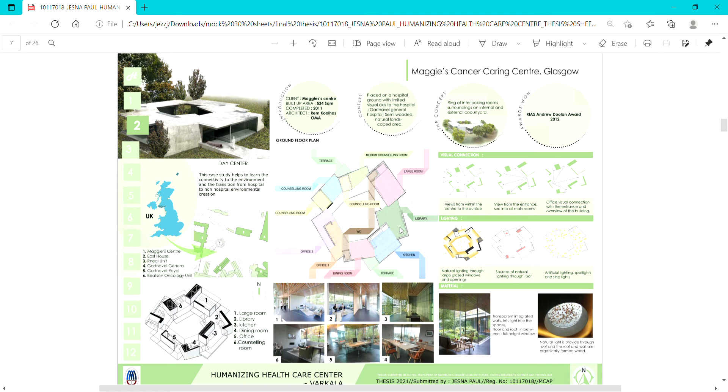In order to acquire more knowledge regarding a hospice, I have studied four different case studies. The first three literature case studies are day centers, which include Maggie's Cancer Caring Center at Glasgow by architect Rem Koolhaas. Instead of creating in-situ rooms, the building is designed as a sequence of interlocking L-shaped figures. The second one is Maggie's Cancer Caring Center at Dundee by architect Frank Gehry. The third one is the Maggie's Cancer Caring Center at Fife by architect Zaha Hadid, which stands overlooking a hollow landscape with direct visual access from the entry itself to the landscape.

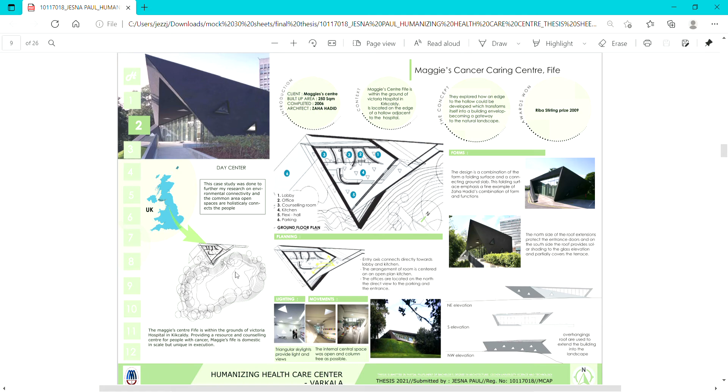The main reason why I studied these three case studies is because of an idea that came into my mind. These cases have form and landscape connectivity, both in space and human interaction. The next live case study is a residential type and also a day center type: architect Sanjay Mohe, Bangalore Karunashraya Hospice.

He oriented all the wards towards the east so everyone will have a rising sun experience to bring more positivity into life. Activity is focused around the water body, and the wards are designed with nurses having direct visual access to their patients' wards. But there was an issue: the staff can't stay longer at the nurses station because of the smell of the toilet placed near the station.

So I have compared various aspects of the case studies I did and have come to a conclusion on how and how not an aged people's caring center should be. Then I charted out the area programming from case studies and standards. I have prepared some important notes on the taken areas with which to design the spaces as well.

The design build-up began from the site and site boundaries. The ultimate thought process was to connect the aged people, their family and other inhabitants to the existing unbuilt character on site. Through my site analysis, the shape of the jagged edge to the roadside, the contour pattern, and 60 meters below the road level to the lake at the southern end, I came across the major issue on the site, the existing natural valley at the center position. It acts as the connecting part of the two sites, and I also took rules based on 200 meters being the average moving distance for disabled people.

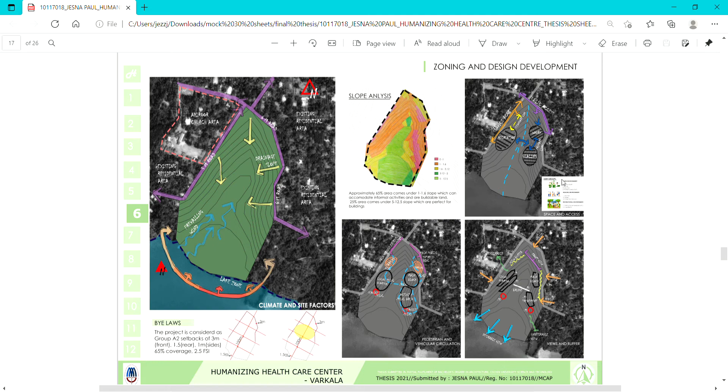Then I divided the site into three major parts based on site conditions and slope analysis: the front portion welcoming area, the center building area, and the last end portion as an unbuilt and water-friendly treatment area. So the center portion of the site is considered the most built area, connecting the two sides and also providing privacy from the outside. In the built zoning, the user group functions and the area that can be built based on the area programming are divided into three parts: main block, recreation and healing environment, and residential.

Then I had to first alter the site and see where I can place the buildings, what the contours are, and how the contours can be edited. You can see that the highest level and the roads are on the 2-meter level. So locating there would make the most of privacy, and the monsoon water flows downwards through the site and overflows at the lowest portion.

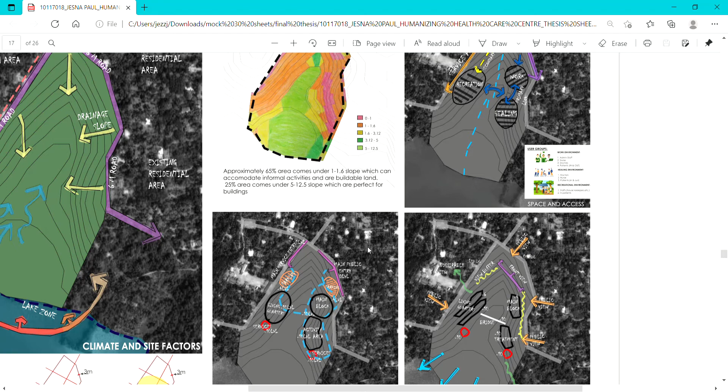So what I altered is that the road level is the main part, and the other contours slope towards the southern direction. So I split the contour in two parts so we can get spaces like the public main block space, recreation and healing space, and residential space. According to the section, we can see how to add this after altering the current contour.

I thought about how to connect these two levels vertically, because it's for elderly persons and for urgent emergencies. That was influenced by Marcel Duchamp's Nude Descending a Staircase painting. He began to break away from cubism. The painting concentrates on depicting its subject in motion. So I concentrated on how motion makes different vision frames and emotional connection, and on bringing all levels to connect.

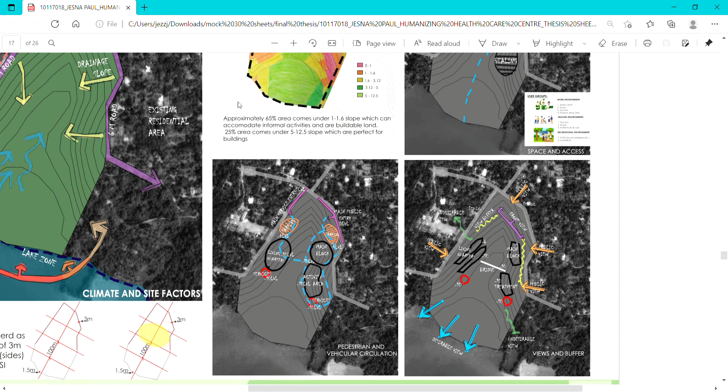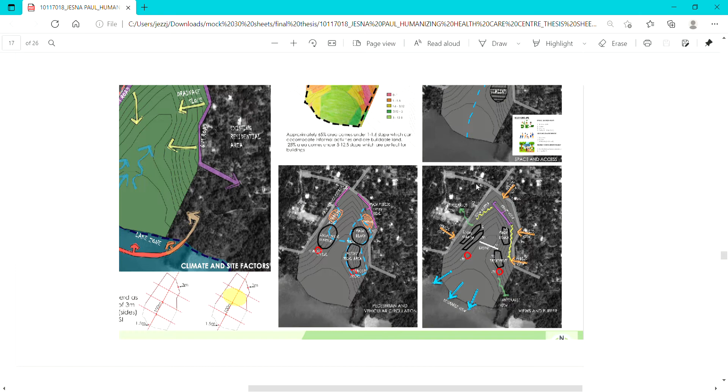These are my programming sheets of the space divisions: the main block and residential spaces, which parts they include, and the individual spaces, where they're placed and what functions they include. These spaces are explained here. Then I did my zoning based on the concept and a series of vision frames connecting the two levels vertically through the ramp, always connecting to nature.

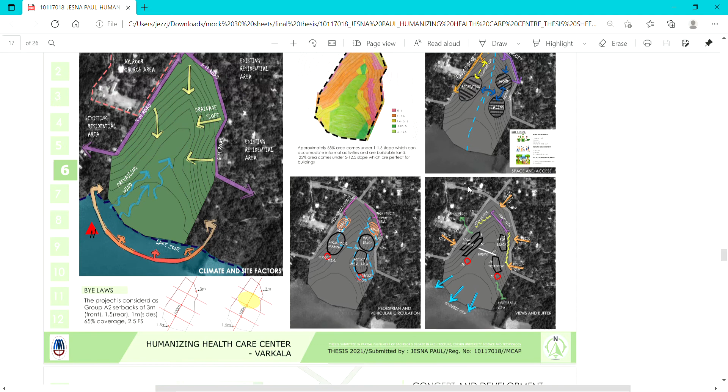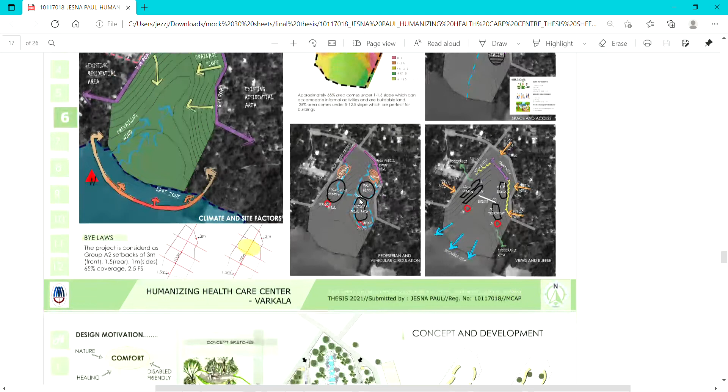So the contextual area of the site consists of residential and commercial to the north and east side of the site, the west side is located to a church area, and the south connects directly to the lake. So my main intention was to create a block vertically connecting the two levels, using the sun position and the wind to our advantage without breaking the visual connection.

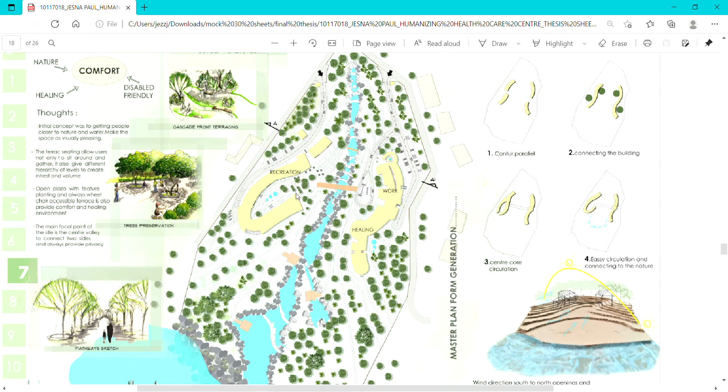So I made the main block 4 meters below road level, connecting the main block level to the next level through a ramp. These connections make shade on the recreation and healing space, always connecting the two levels to nature without disturbing the views, and it's naturally ventilated due to the tunneling effect. The thick vegetation surrounding the site makes a natural buffer and reduces the heat.

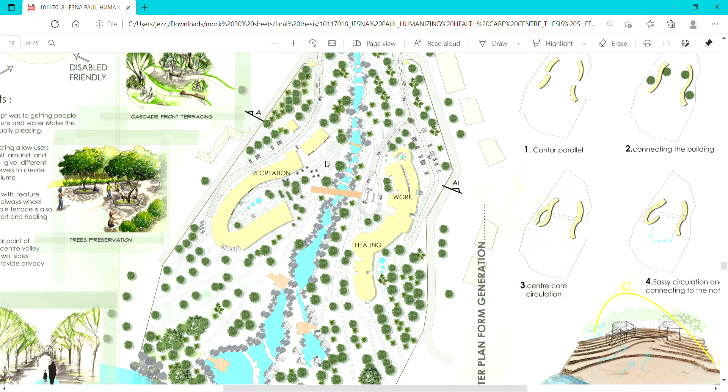So the next thing I did was the access to the level from the road. Mainly two entries are provided to the site. One is the main entry onto the main block, and the service entry gives access to the next level and makes the service easy, along with the bridge connection for the patients' easy access. The main block, recreation and residence spaces go from public to semi-private.

There are actually a lot of trees in the front portion and highest levels of the site, so they act as a natural buffer to the building and provide privacy. The services are shown on the two sides: the water tower and electricity spaces at the highest level near the main entry, and at the lowest part the STP and waste management on the service entry side.

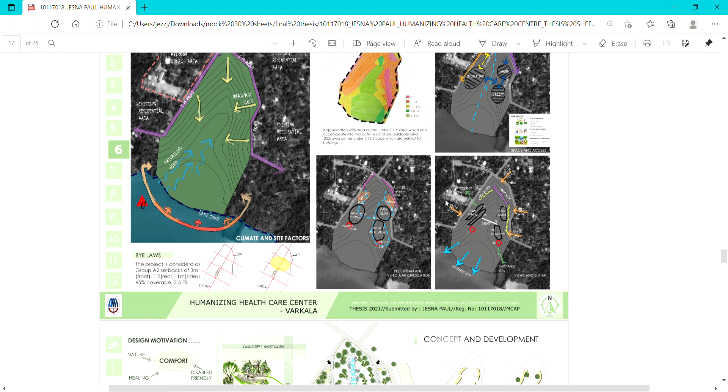So the levels play different volumes of frame vision, so they will see a different view when they wake up, and the caring center needs privacy. I have preserved most of the trees on the site and made it a buffering space. Coming to site views and vistas, with my stepped contours, all of the spaces will have a positive view to the south side. They also make a visual connectivity to the other spaces.

So the main block and admin give positive access towards the south, and the water drainage pattern makes a natural cascade on the site, contributing continuity to the lake, with a bridge to cross the cascade. The reflection makes a different vision experience at different levels.

The initial concept was getting people close to nature, and water makes the space visually pleasing. The terrace seating also gives a different hierarchy of levels to create interest and volume, and the main focal point of the site is the central valley connecting the two sides. The form development is parallel to the contour, from the case study spaces, and provides comfort and easy access for wheelchairs also. The ramp makes these connections, and the wind and sun direction play out as different levels of experience in individual spaces.

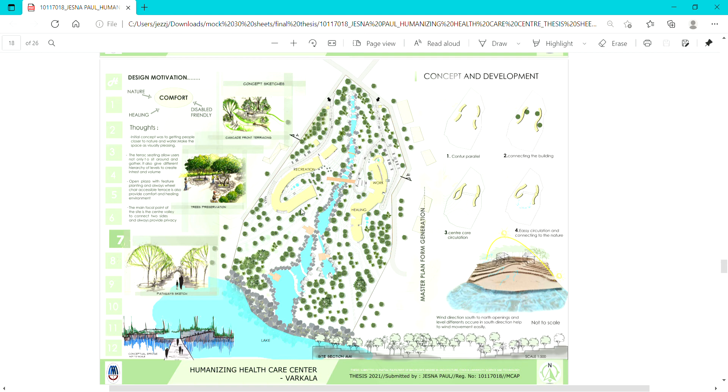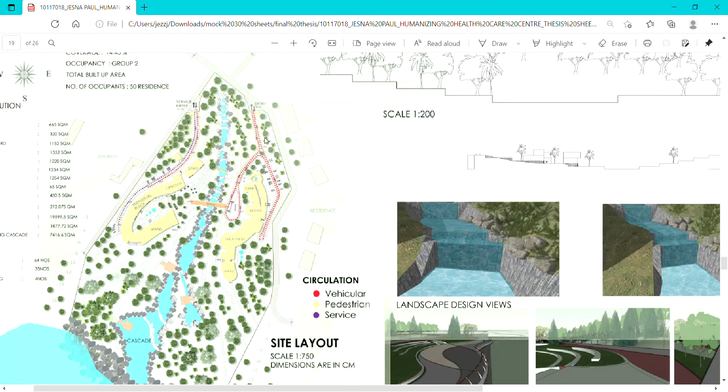Moving to the design, from the main road a person actually sees a green space cascade and the main block, but most of the building is going to slope down, so they will only see the smallest volume of the building. So for views and vistas, I have made blocks in such a way that when a person enters, they get a framed view of designated views from the other spaces inside the building. They define different visual connectivity.

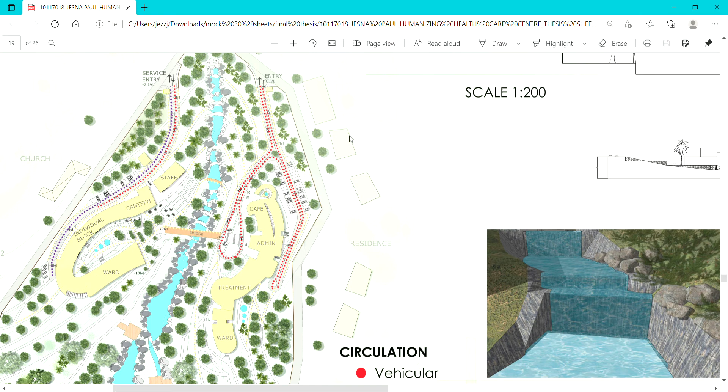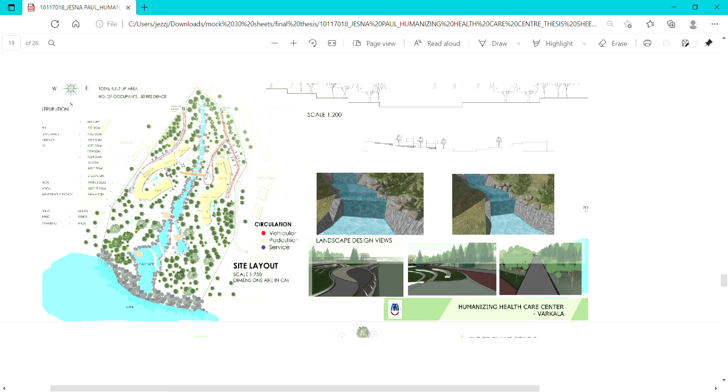Then I came to how to use the access and the buffer space, making the entry from the main road and always accessing the same path. So when a person enters, they first move to the main block. They understand the main volume and vision frames from different levels. On a user group basis, doctors and patients directly enter the recreation space so they do not disturb the admin access. It makes it easier for the user spaces.

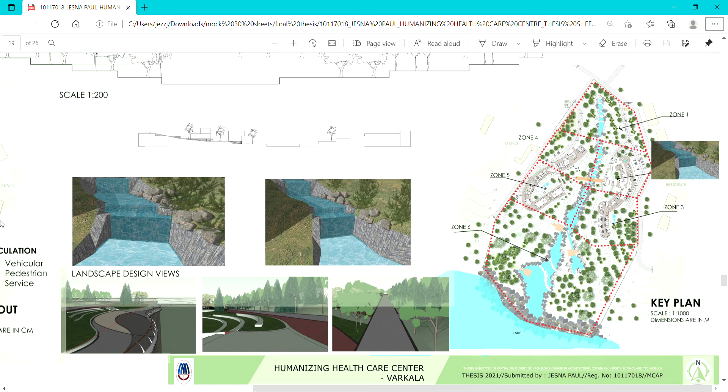Main interaction spaces occur in the core of the buildable spaces, connecting the public and the patients inside, which is more helpful. And at the lake part, it's making a soft engineering method, 1 meter, to protect the soil using rock, and it is eco-friendly. And also provide the cascade extension to the lake to connect the rainwater to the lake directly so it doesn't affect the outside. And the services entry part connecting to the recreation and residential area provides more privacy from the public.

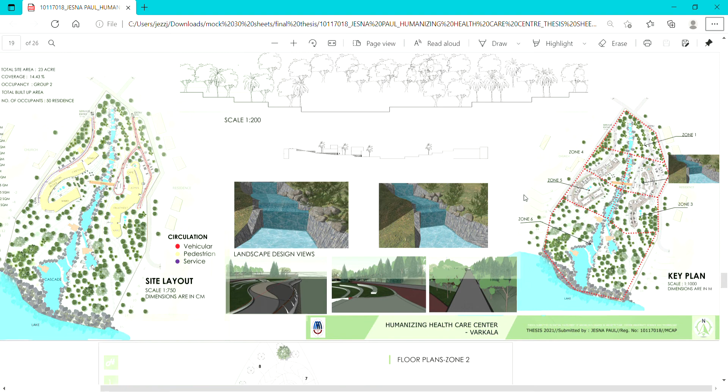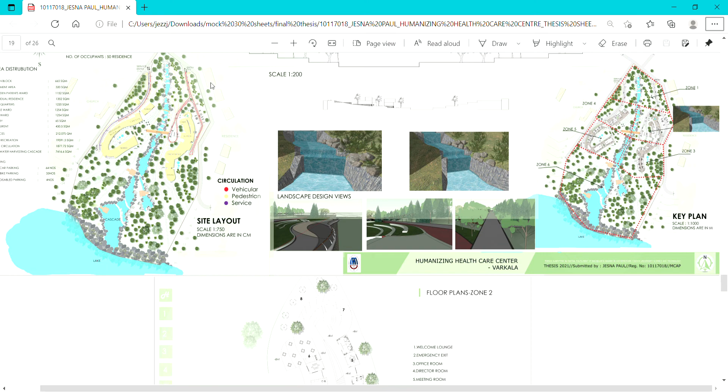And also the building is placed tilted 30 degrees to provide a view to the lake, and also connecting the pathways to the surrounding site. Moving on to the design, I have divided the design into six zones, only for the purpose of design legibility, and there is no zone division in the actual design as such. So first, I will be talking about zone one.

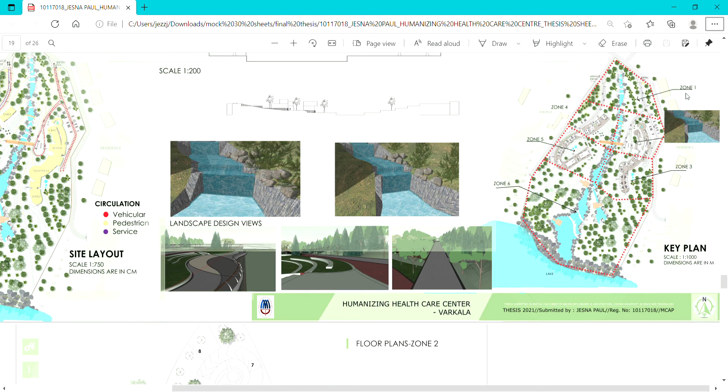It's the welcoming part and area at the road level, and also the service entry occurs on the left side of the service road part. From the zeroth level, the building is placed 4 meters down, so in the surrounding zone the buildings are placed 4 meters under. Provide a ramp down and make greenery and water flow. The zone gives comfort to the visitors.

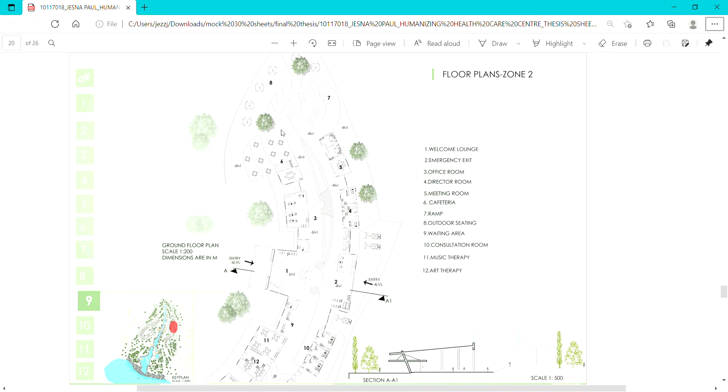And zone 2 is the built zone. The main block occurs in this part of the building. The main entry is provided at the -6 meter level and the emergency entry occurs at the -4 meter level. Two levels of the building connect the pathways. The office spaces and visitors, patients, family members, cafeterias and waiting areas occur in the zone, and also provide doctors' consultant rooms near the entry.

The treatment area moves down below the office spaces, that is zone 3. That includes treatment and bedridden patients' wards. At a time, it accommodates 12 bedridden patients, and also provides massage, art therapy, music therapy, and conversation rooms. It's also connected to the outside space. The ramp corridor connects the -6th level to the -10th level of the building.

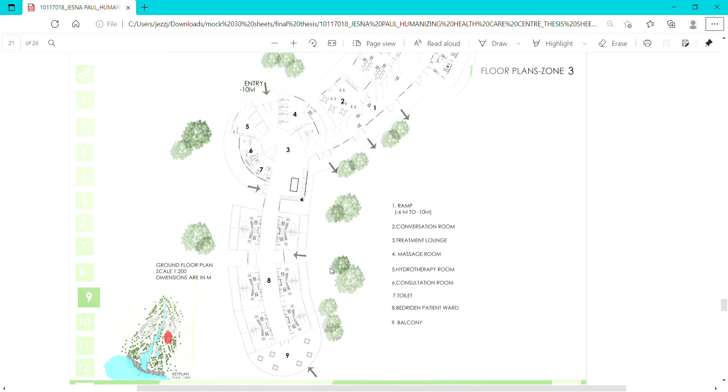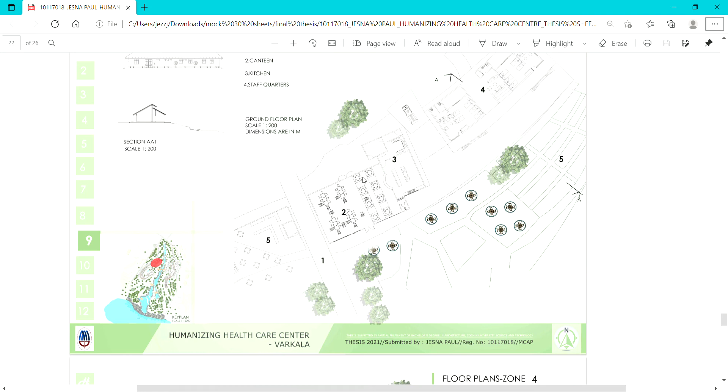Zone 4 considers the recreational cafeteria and staff accommodation area. The staff accommodation is near the cascade. In the case studies part, at Karunashraya I understood the nurses and staff are always near patients, so they have no relaxing time or their own space. So they need private spaces. And the cafeteria part connects to outside seating and farming space, engaging patients in their own farming activities.

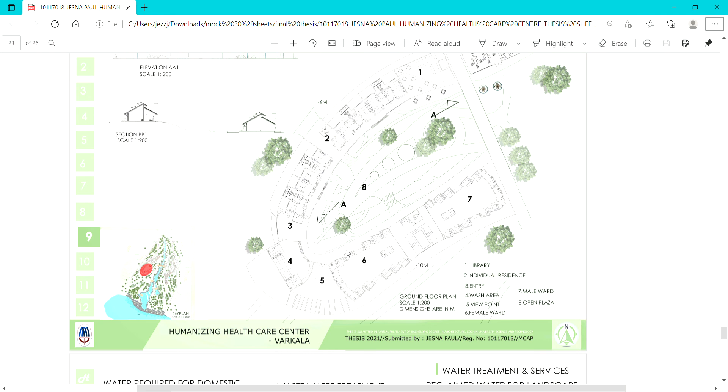Zone 5 considers the residence block for family and also the wards. The building is placed on two levels with a 4-meter height difference, so they do not block the views. And also connecting an open center plaza for connecting people, and the ward beds are placed at a 30-degree tilt. It provides privacy and morning sunlight for fresh, positive days. Then the water treatment, water tank and STP positions, the services, are provided.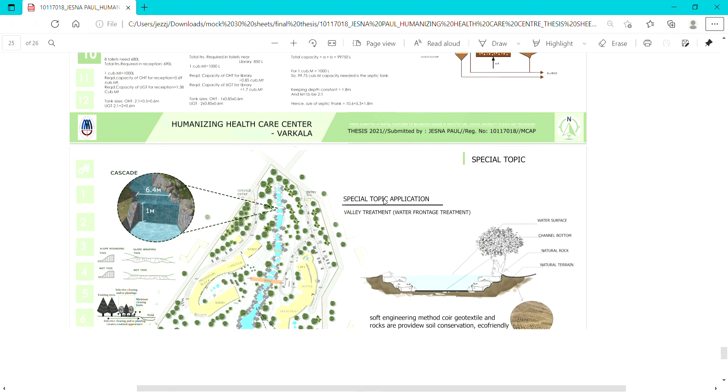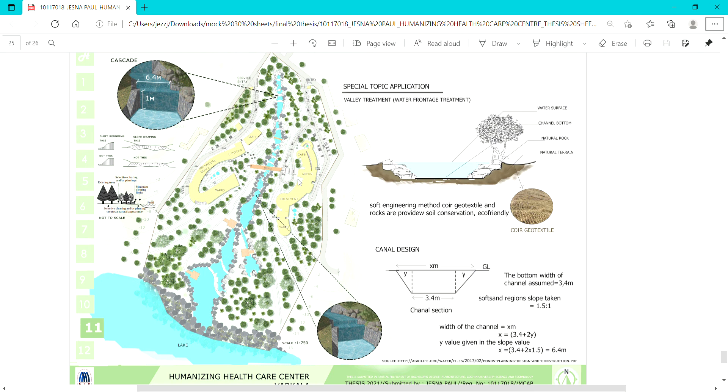Then coming to my special topic, considering the valley treatment and waterfront treatment, it's using a soft engineering method, using coir geotextile and rocks to provide soil conservation, and it's also eco-friendly, so only in monsoon time it acts like a cascade, and it's also used for farming after the rainy seasons. And also I calculated the canal design and the water flow per year in this design from the irrigation department.

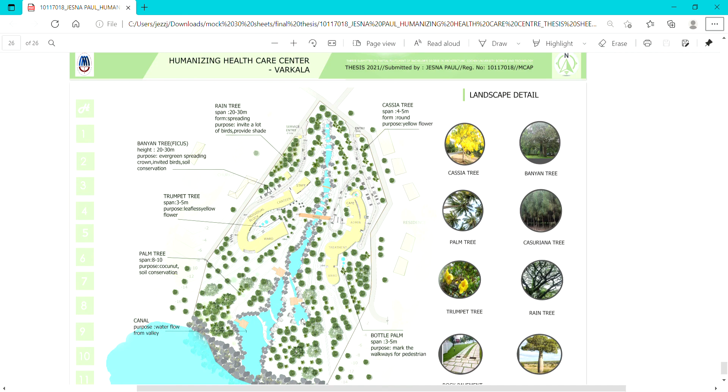And also preserving the existing trees and adding more to provide a cool and healing environment for helping the patients. So that's how the design came to be, and thank you.